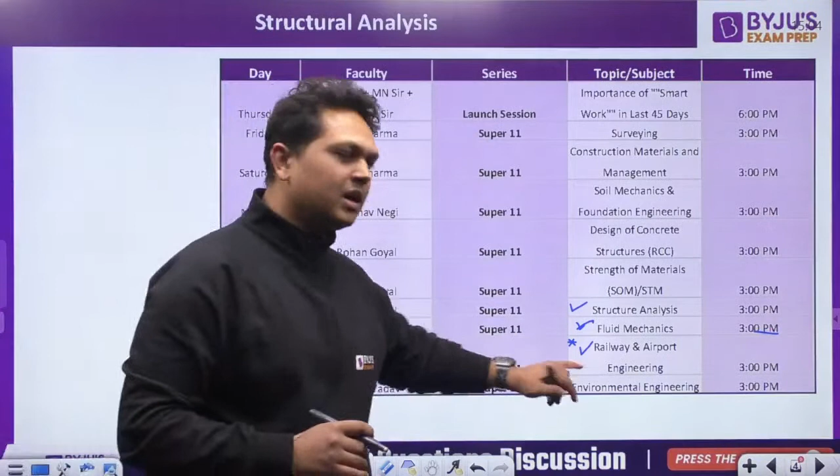So let us start. SOM weightage, yeah, it is around 4 to 6 marks on average, but you cannot say for sure that it will be this much only.

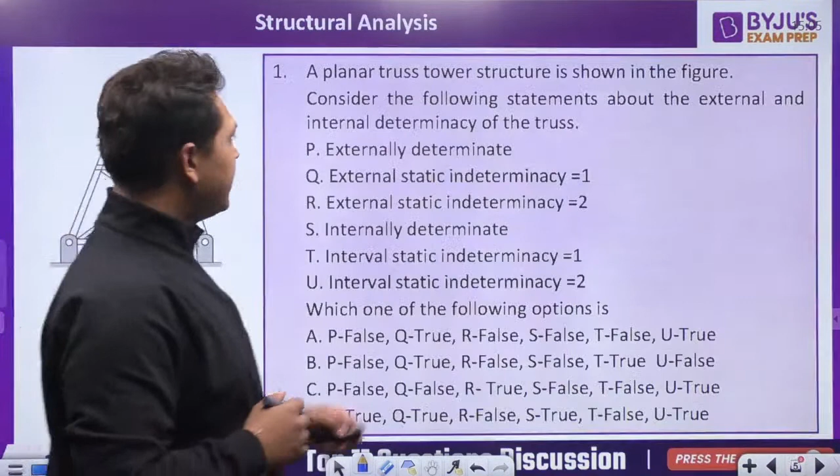Welcome, join fast, quick, we are about to start. So let us start with today's session. Here is the first question. Read the question carefully, very good question. A planar truss tower structure as shown in the figure - consider the following statement about the external and internal determinacy of the truss. You are given a truss over here, and you are asked to comment upon the external and internal determinacy of this given truss.

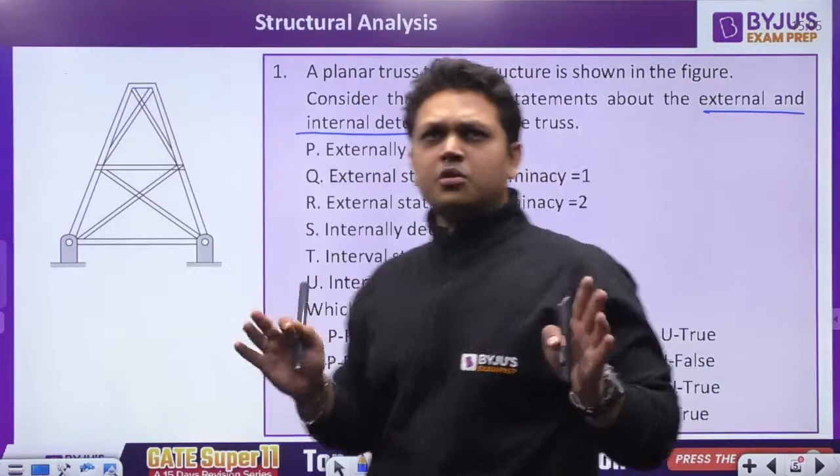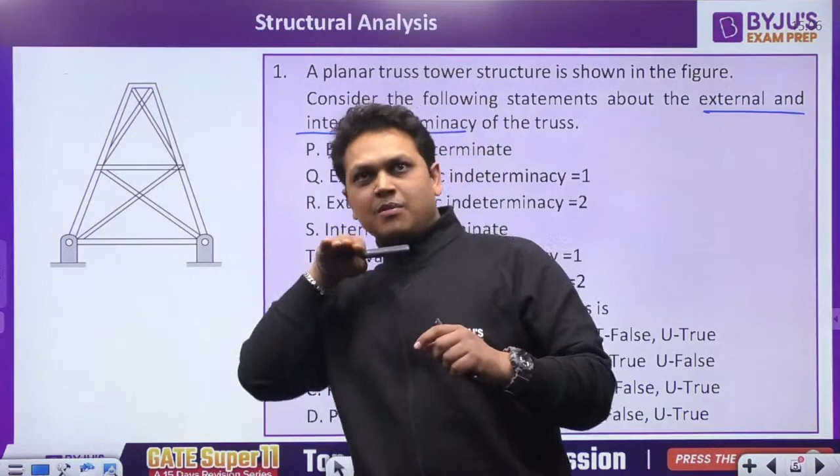Now, few students may get confused - sir, what is external determinacy and what is internal determinacy? Now, if you imagine your body, you are standing still right now. What are the external reactions you are getting on your body? If you are standing like this, the external reaction I am getting is from the ground below - there is a normal reaction from the ground below, over my foot, that is the external reaction. So if suppose I have skates on, if there is some horizontal reaction, what will happen? The skates will go ahead and I will fall down. So at a roller support, I have to balance as if there should be only a normal reaction upward, so if a horizontal force is there, I will fall - that means instability will occur.

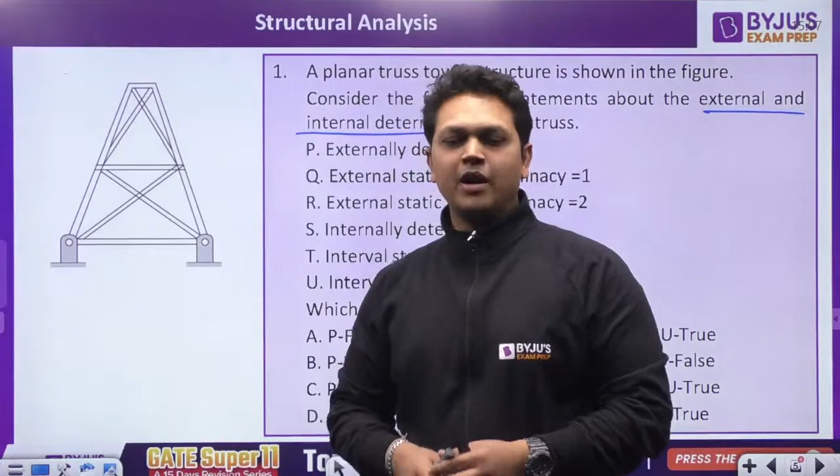So the number of external reactions are accounted by the external determinacy. And what do you mean by internal determinacy? Internal are the number of bones you are having in your body. If one of the bones is missing - I am lifting up this remote over here - if suppose this bone is missing over here, will I be able to lift this remote? No, it will behave like a rubber, my arm will behave like a rubber, it will be inefficient to lift any weight at all. So this is your internal determinacy.

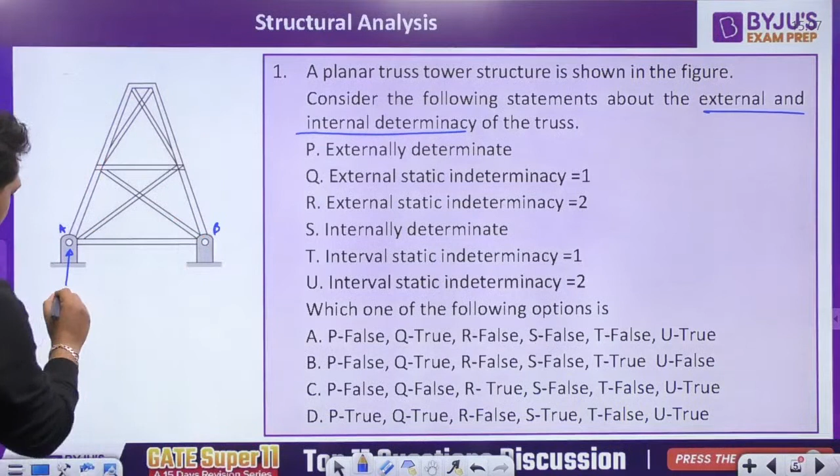Similarly, over here for this truss, the external determinacy will be the number of unknown reactions that are externally present. So we are having two pinned supports over here - let us call this as A, and let us call this as B. So there is a vertical reaction at A and a horizontal reaction at A, and similarly there is a vertical reaction at B and a horizontal reaction at B. So what are the number of unknown reactions? 4. So degree of external indeterminacy is given as...

Number of unknown reactions minus number of equilibrium equations. Number of unknown reactions: 1, 2, 3, 4 - 4 number of unknown reactions. Number of equilibrium equations - how many equilibrium equations do we have? We have 3 equilibrium equations: summation of forces in the horizontal direction, summation of forces in the vertical direction, and summation of moments at every point.

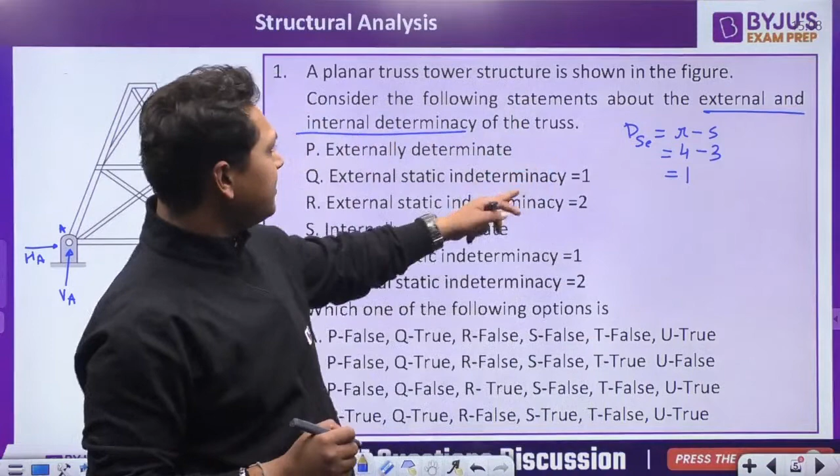So our external indeterminacy is 1 degree. That means the structure is externally indeterminate by 1 degree. Yes or no? Now internal indeterminacy is...

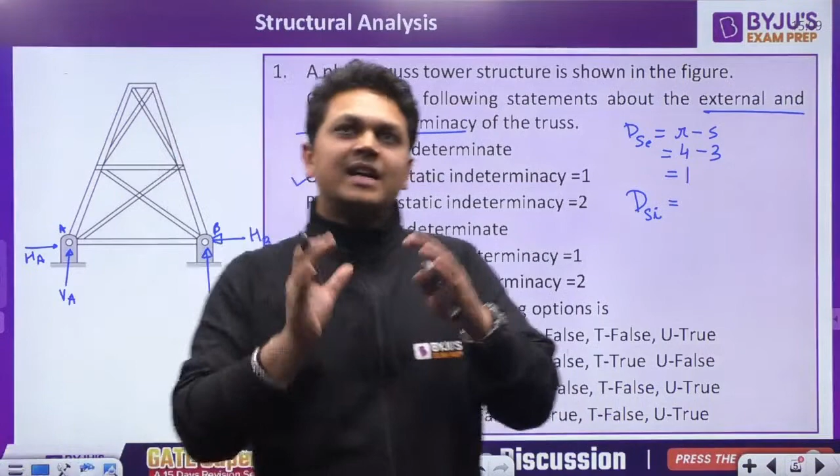How many extra members, redundant members is this truss having? This is given by the formula M minus 2J minus 3, where M is the number of members. Let us count: 1, 2, 3, 4, 5, 6, 7, 8, 9, 10 and 11. So we have 11 members.

11 minus 2 times number of joints. How many joints do we have? We have one joint over here. Let us write it as 1, 2, 3, 4, 5 and 6. So 6 joints we have. 2 into 6 minus 3, this comes out to be 11 minus 12 minus 3 is 9. 11 minus 9 is 2.

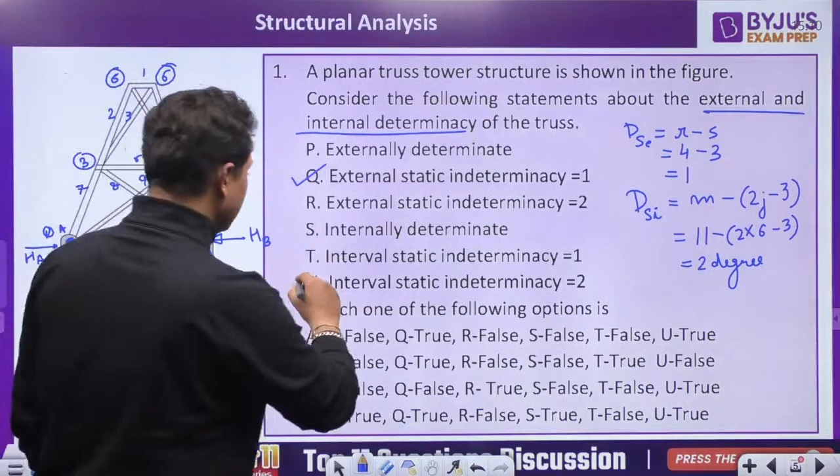So the degree of internal indeterminacy is 2 degree. So the answer is Q and U are correct, rest all are false.

So you are asked to tell which of the following options is the right answer. So P is false, so Q is true. So we are having Q true in these 3 statements, and then we are having U true, over here and over here. So we are having 3 options. No, we are having 2 options.

So this is not possible, and this is also not possible. So A and D. Now look over here, P is also true and S is also true, which is also false. So the answer is A. A is the right answer.

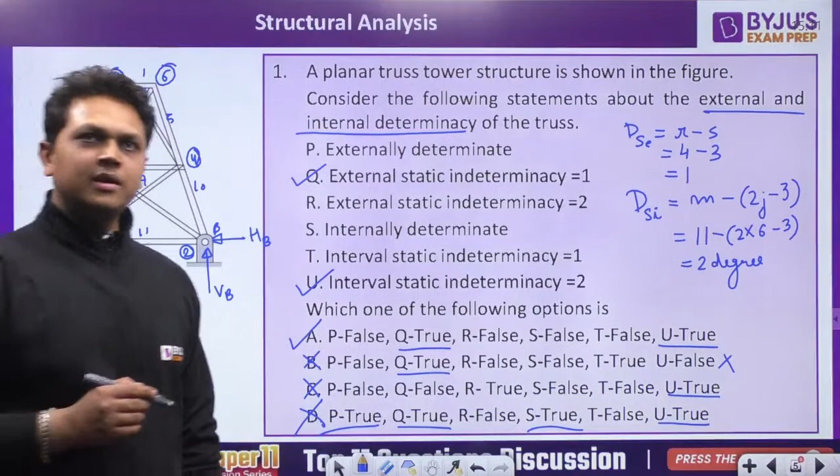Any doubt to anyone in this particular question? Very easy question and a very probable question also. Such type of questions are repeatedly asked based upon determinacy. Very easy questions. Just study the indeterminacy chapter once if you have not studied it yet, study the degree of static indeterminacy and kinematic indeterminacy, how to find those, for beams, trusses and frames.

Next, the degree of static indeterminacy of a rigid jointed frame PQR supported as shown in the figure. So you have to find out the degree of static indeterminacy for this particular frame. So over here it is given to you, this is a cable and this is your rigid frame. Let me make this a little thick over here.

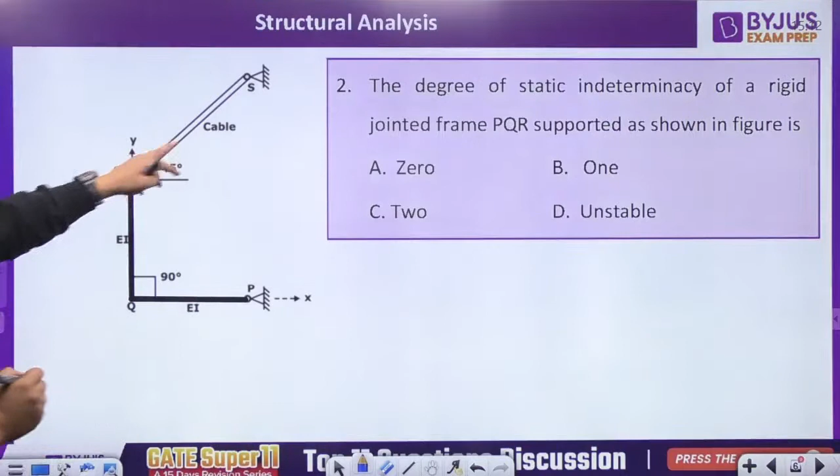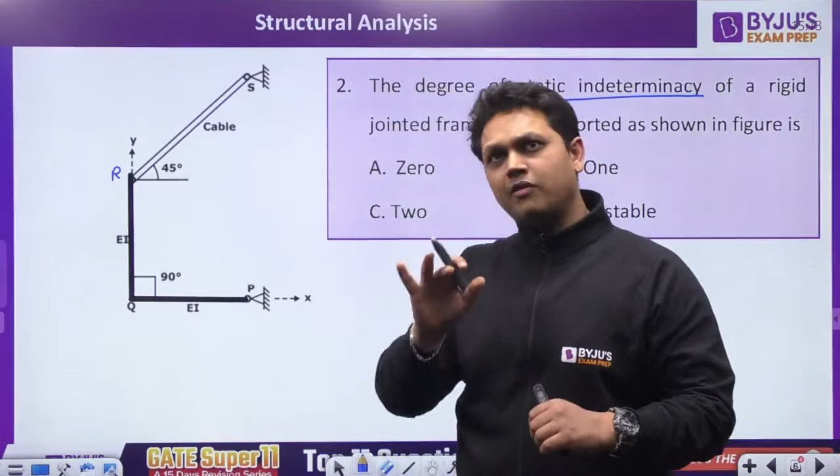So you are given a frame PQR, and this RS is given to you as a cable. RS is given to you as a cable. Now, what will be the degree of static indeterminacy asked to you? Beams are always internally determinate. The degree of internal static indeterminacy is always 0 for beams.

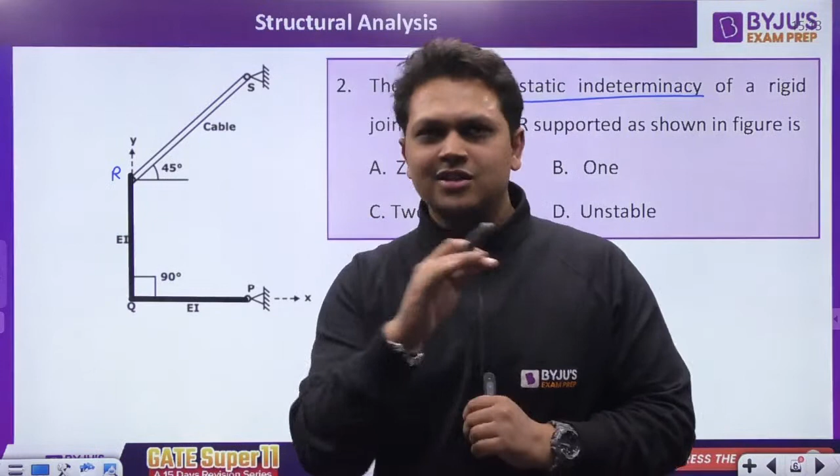So we are only going to have external indeterminacy. External means the number of external reactions applied by the external supports. What supports are we having? We are having a pin over here and a pin over here. At a pin support, you get two reactions: one horizontal and one vertical. So you draw a horizontal reaction at P and a vertical reaction at P, and similarly a horizontal reaction at S and a vertical reaction at S.

So when you do such a thing, this is where you make a mistake. Are these two unknowns? This is the question. When we write the equation, degree of static indeterminacy equals number of reactions minus number of equilibrium equations. R are your unknown reactions.

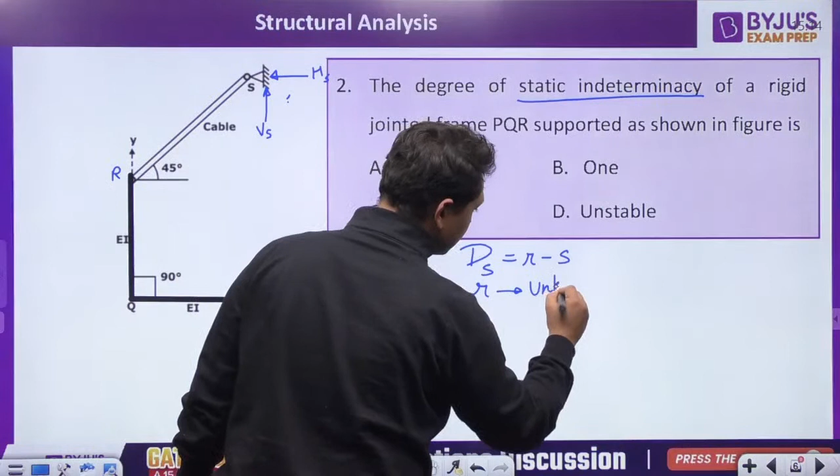These are your unknown reactions. So are these two unknown? The point over here is, there is a cable, and the cable is only able to take axial forces. So this cable can only be stressed axially, it may be tension, it may be compression, whatever it may be. I'm just taking an example. So the cable is only able to take axial forces.

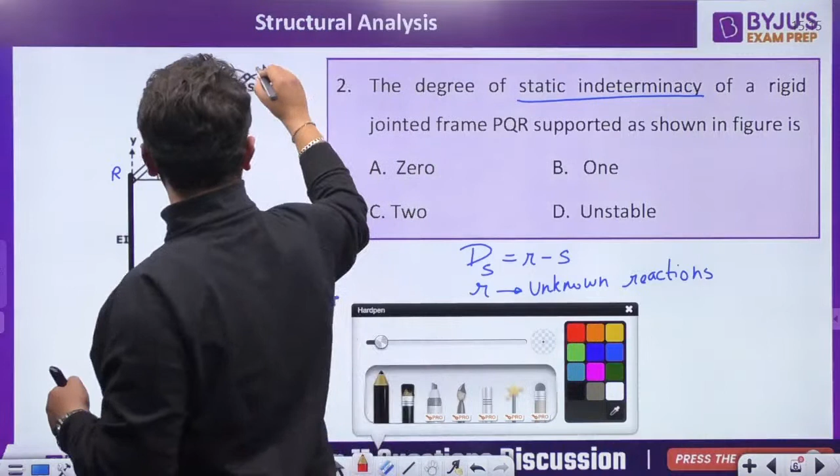So if it is only taking axial forces, the reaction offered over here will also be along the direction of the cable. Yes or no? The reaction that I'm going to get over here will also be along the direction of the cable, at an angle of 45 degrees. Yes or no, everyone? Do you understand this concept or not?

So if we know the direction of this reaction R at this pin support, don't we know what the horizontal and vertical components are going to be? R cos 45, R sin 45. Don't we know the horizontal and vertical components? And if we know them, are they unknown? No.

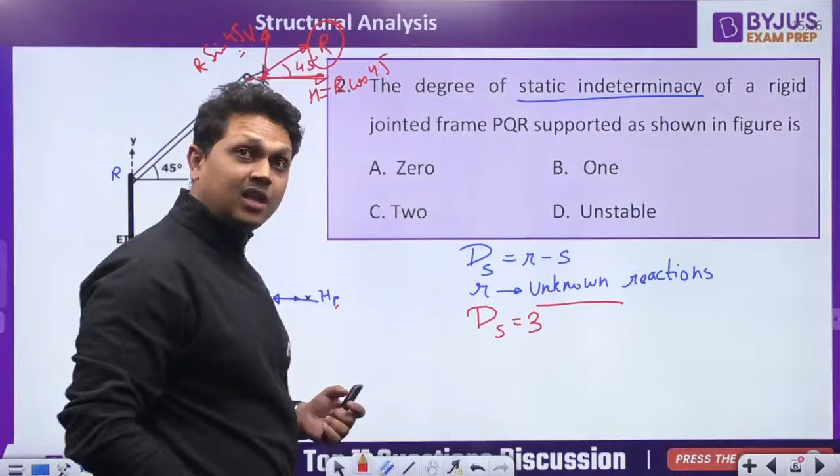So over here, the only unknown reaction is R. So what are the number of unknown reactions? 1, 2 and 3. So the degree of static indeterminacy is number of unknown reactions, 3, minus 3 equilibrium equations. So it comes out to be statically determinate, and the degree of static indeterminacy is 0. A is the right answer.

Very good question. You need to understand the property of a cable. That is all that is tested in this question.

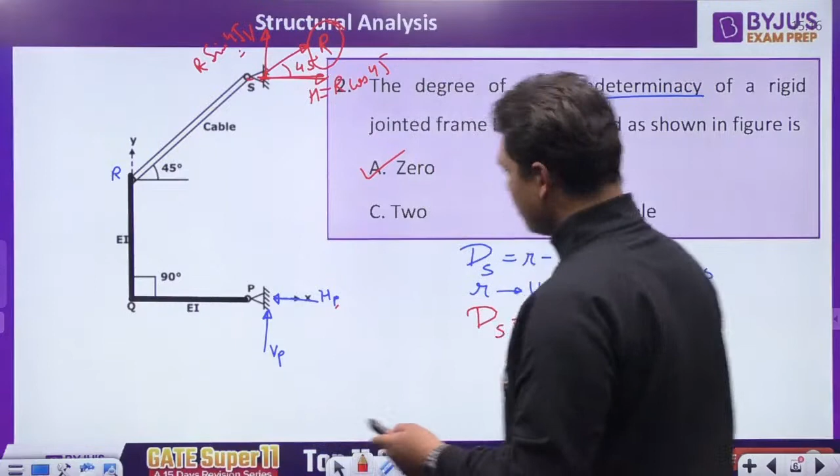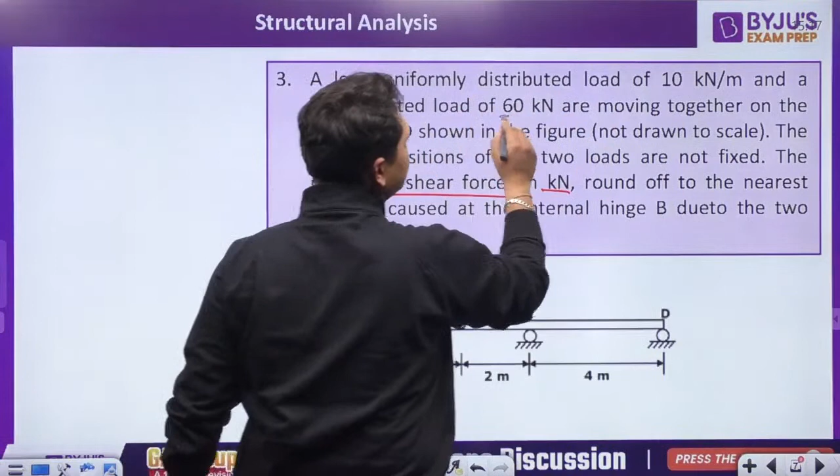Moving on. A long uniform distributed load of 10 kilonewton per meter and a concentrated load of 60 kilonewton are moving together on a beam ABCD shown in the figure, not drawn to scale. The relative positions of the two loads are not fixed. The maximum shear force in kilonewton, rounded off to the nearest integer, caused at the internal hinge B due to the two loads is asked. So basically it is asking us what is the maximum shear force possible at this hinge B due to these two loads, a point load of 60 kilonewton and a UDL of 10 kilonewton per meter.

So what do we need to do? We need to draw the ILD for shear force at B. In order to draw the ILD for shear force at B, we cut the section at B and lift the section by unit 1, by Mueller-Breslau's principle. So this is unit 1. You will get the ILD for shear force at B as this one. This is the ILD.

This can be positive or negative. Shear force can be either positive or negative. The sign is not mentioned as to what we have to take, but we will answer in positive only. We will not consider negative.

So now where should you place your UDL? Your UDL will come like this for the maximum shear force at B. And further, your point load will be at the maximum value over here. So the 60 kilonewton will be placed over here and the 10 kilonewton per meter will be placed over here.

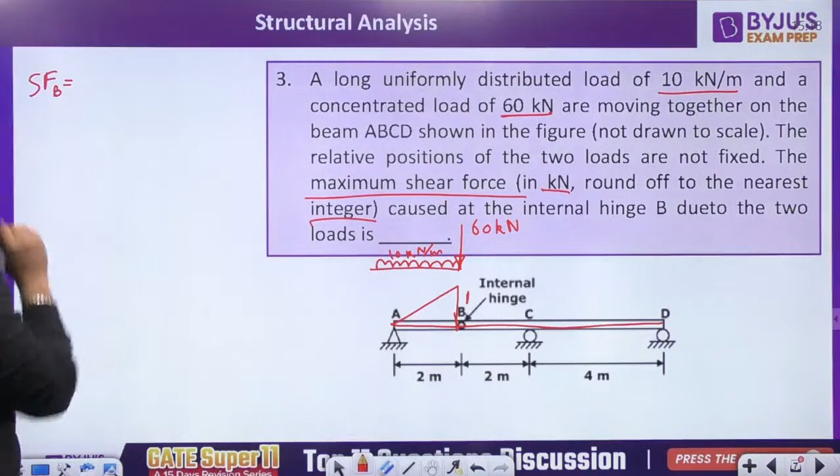Now what will be the shear force at B? It will be equal to the UDL into the area of this triangle, half into base, which is 2 meters, plus the point load into the distance below the point load on the ILD. So 60 into 1. This will cancel out, and this will become 10 plus 60, which is equal to 70 kilonewton.

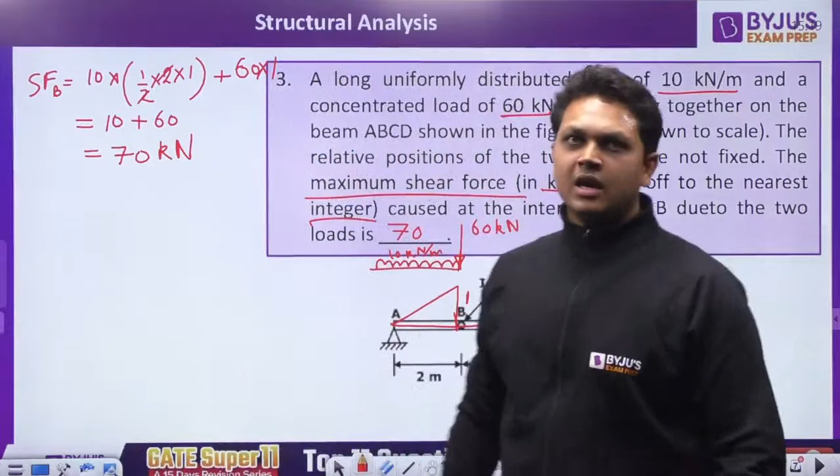So the answer is 70. Any doubt to anyone? Very easy question. All you need to know is how to draw the ILD. Rest all is very easy.

Next question. The influence line diagram shown is for the member. So you are given 4 members: PS, RS, PQ, QS. So which of the 4 members is the influence line diagram shown for?

Tell me. Very, very good question. Very good question. Tell me, guys. What is the answer?

So over here, the examiner is testing whether you know how a truss behaves. In order to find out the ILD, a student may think, sir, I have to check each and every member over here to tell which of the following is the ILD for this member, right? That is not possible, because testing for even a single member takes time. At least 5 minutes are required to draw the ILD for just one member.

And here I have to draw for 1, 2, 3, 4 members: PS, PQ, QS, and whichever is not there. PS is there, RS is there, QS is there, PQ is there. So this one, PR, is not there. So 4 members are there. So it is not possible to draw the ILD for each and every member and then tell which of the following member this ILD belongs to.

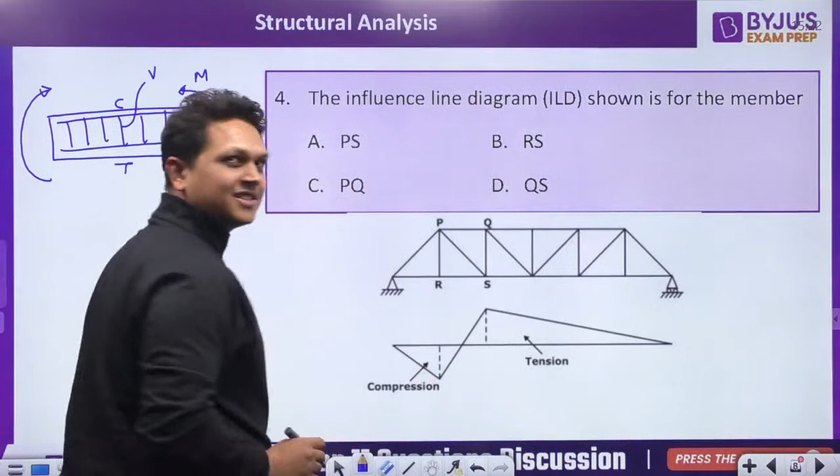Similarly, the top chord members of the truss respond to any load over the truss. See, the load is moving over the truss. Due to any load on the truss, the top chord members are under compression and the bottom chord members are under tension.

And these diagonal members are subjected to alternate compression and tension, depending upon the location of the load, whether it is over here or elsewhere. So depending on that, you can see there is compression as well as tension.

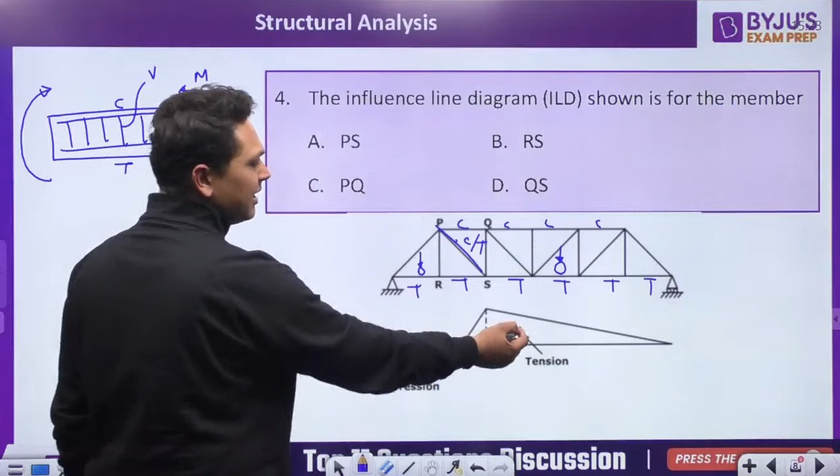So which of the four members does this ILD belong to? Obviously the diagonal member, that is PS. The answer is A. Isn't this an easy question? All you need to know is the behavior of a truss.

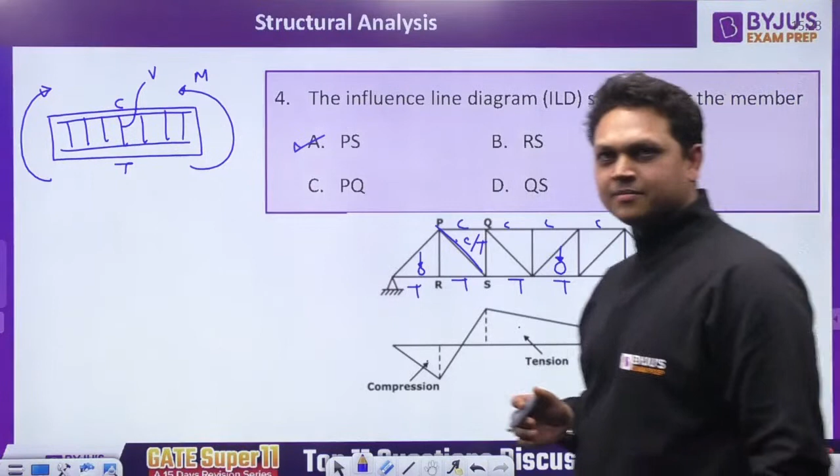Moving on to the next question. Another very good question, this concept has been asked in various questions. All members in the rigid jointed frame shown are prismatic and have the same flexural stiffness EI. Find the magnitude of... this question is incomplete.

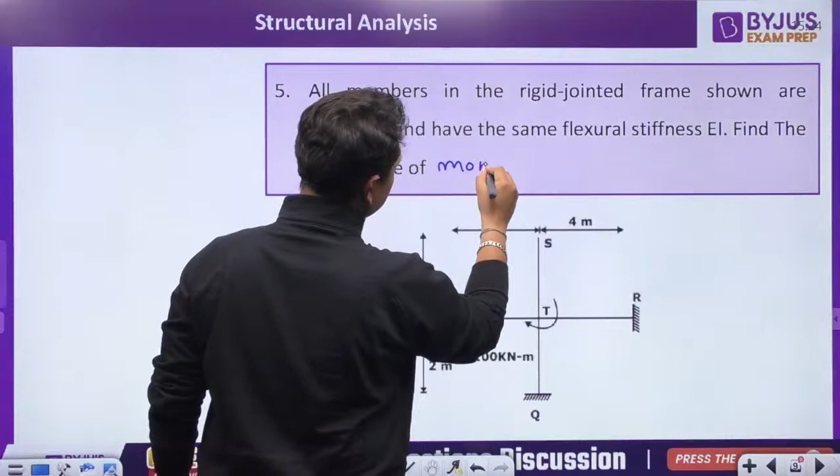Find the magnitude of moment at support Q. So what will be the moment reaction at Q, it is asked.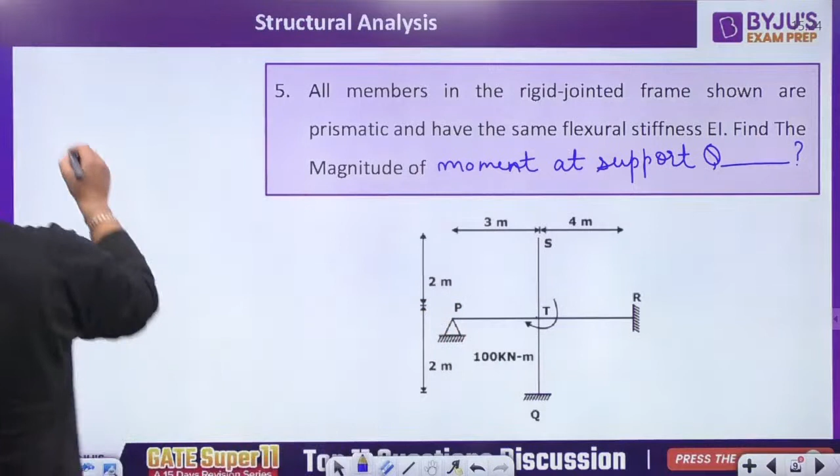The moment of 100 kilonewton meter is acting at rigid joint T. This 100 kilonewton will be distributed to all four members depending upon their distribution factors. You must have studied distribution factors, which is the stiffness of a particular member divided by the summation of the stiffness of all the members. So let us write down the stiffness factors for all the members.

We will have member, K, and distribution factor. The members we have are TP, TQ, TR and TS. For TP, the far end is hinged. For a far end hinged, the stiffness factor is 3/4 I by L. If you do not know these values, then you need to go through the basics again.

So 3/4 I by L. L is: this is 3 meters, this is 2 meter, this is 4 meter, and this is 2 meter. So L over here is 3 meters. I will substitute the value: 3/4 I by 3, this will cancel out, giving I by 4.

TQ's far end is fixed, so stiffness is I by L, which is I by 2. TR's far end is again fixed, giving I by 4. And TS, the far end is free.

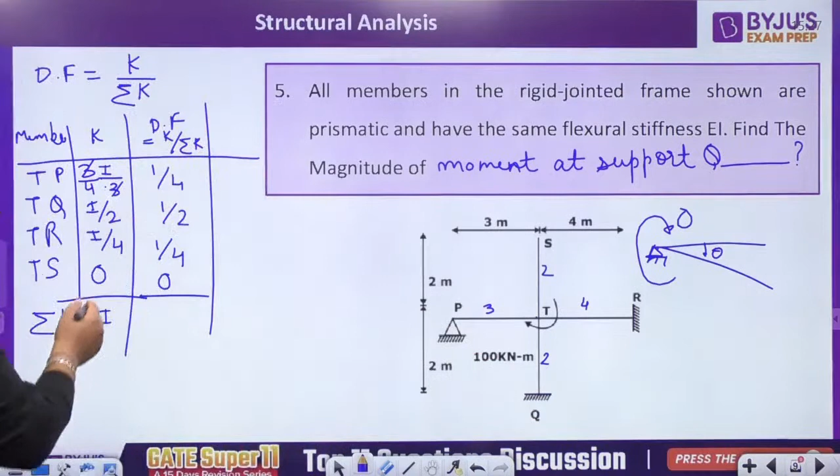One by 4, 1 by 2, 1 by 4 and 0. But we are only interested in TQ. So the distribution factor for TQ is 1 by 2.

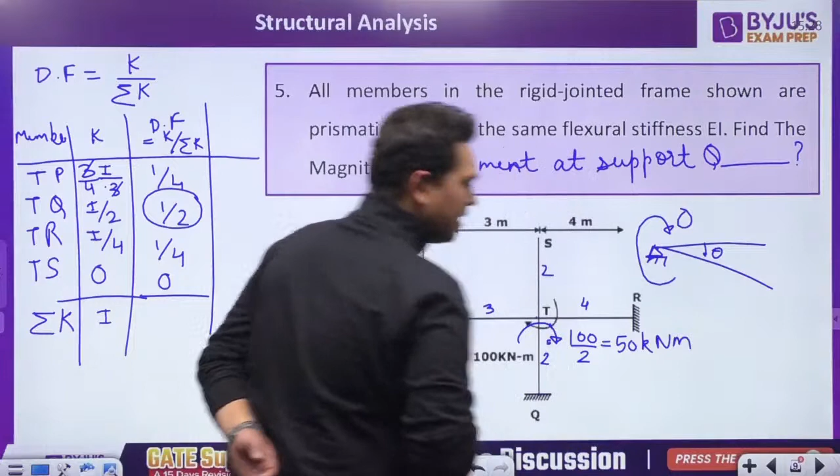If the distribution factor for TQ is 1 by 2, then this TQ member will be taking a moment equal to 100 by 2, which is equal to 50 kilonewton meter. But this is the moment which is going to be resisted by member TQ.

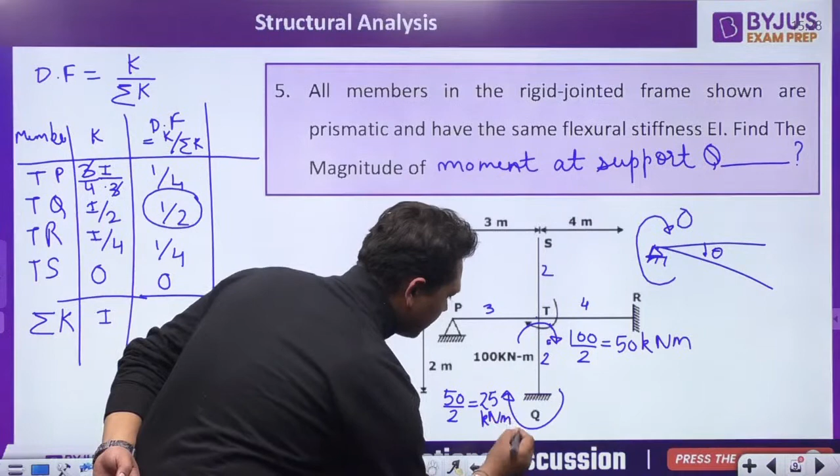But what will be the reaction at Q? Which is equal to the carryover moment. If there is 50 over there, the carryover moment will be 50 by 2, which is equal to 25 kilonewton meter. So the answer to this given question is 25.

What if S has a roller support? If S has a roller support, it still will not be able to resist any moment. It also depends upon the location of the moment, location of the roller. If the moment is applied like this, and the roller is provided like this, it will provide a reaction and behave like a pinned support. But if it is at some other location, it depends upon the reaction.

Moving on to the next question. Very good, everyone. This type of question has been asked at least 2 to 3 times in the GATE examination, so I am taking this question, and I also want to address one very good concept.

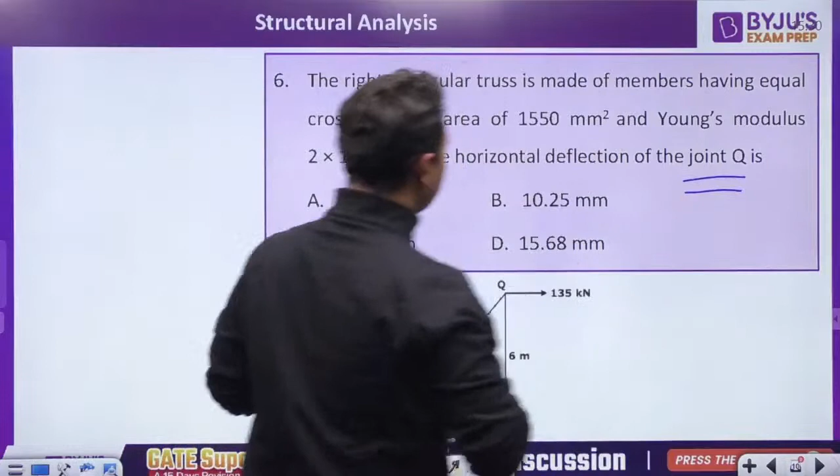A right triangle truss is made of members having equal cross-sectional area of 1550 mm square and a Young's modulus of 2 into 10 to the power 5 megapascal. What is the horizontal deflection of the joint Q?

So what are you going to do? You are going to use your formula. The horizontal deflection at Q is equal to summation of PkL upon AE. I will draw the table.

Let us take the member PQ and find out first the K value, then the P value, and the L value, and based upon that we will find out PkL upon AE.

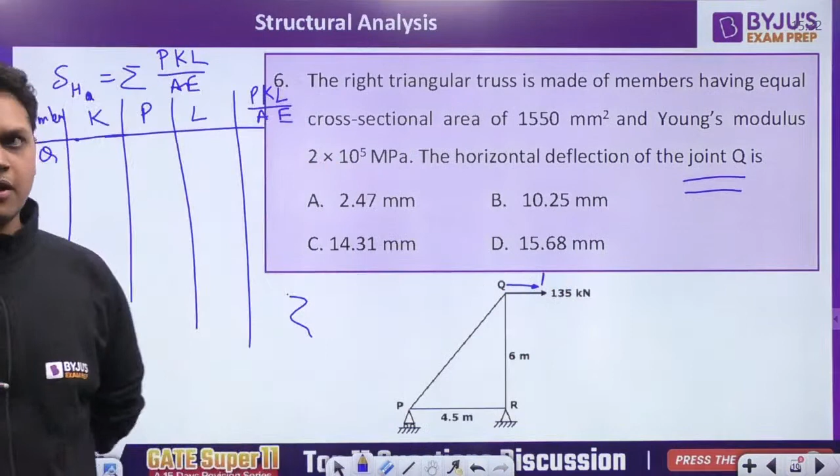For member PQ, K is the load which comes in this particular member due to a unit load applied in the direction in which you want to calculate the deflection. So you want to calculate the horizontal deflection at joint Q, so you apply a unit load in the horizontal direction at joint Q. Due to this horizontal load at joint Q, the reactions in the other members need to be calculated.

This is 4.5 and this is 6, and this is a right angle triangle. What is 4.5? 3 times 1.5. What is 6? 4 times 1.5. Don't you see something similar here? 3, 4 - it is a magic triangle. So this is 3, 4, and this will be 5 times 1.5, which is equal to 7.5.

If this is 1, there will be a reaction. Since 1 is acting in this direction, you require a resistance in the opposite direction, so this will act in the opposite direction like this. This creates a component of the reaction in the downward direction, so the reaction here will be like this. Similarly, this reaction is in the upward direction, so the component will be in this direction, and we require a resistance in this particular direction, so it will be like this.

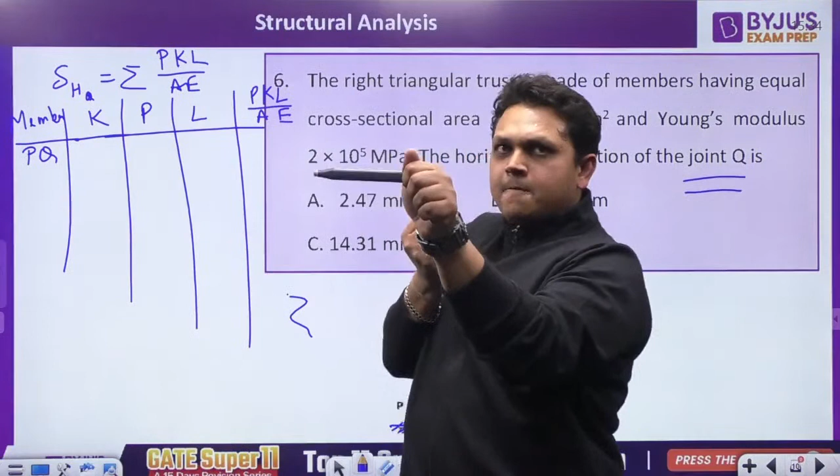Why? If this is pinned, if these two supports are pinned, that means they are fixed at the location. If I have a member in between two supports that are fixed, will this member ever be stressed? Never. This will get stressed only when there is some deformation. If this is a roller, and it wants to move in this direction but the member pulls it back, then it will be under stress because it is providing resistance - only because there is a roller here. But if it is pinned, it will not be stressed; it will have zero force.

So once GATE has also asked a question giving pinned supports at both ends, you just need to pay attention to the supports. Over here, since a roller is there, you will get a reaction here.

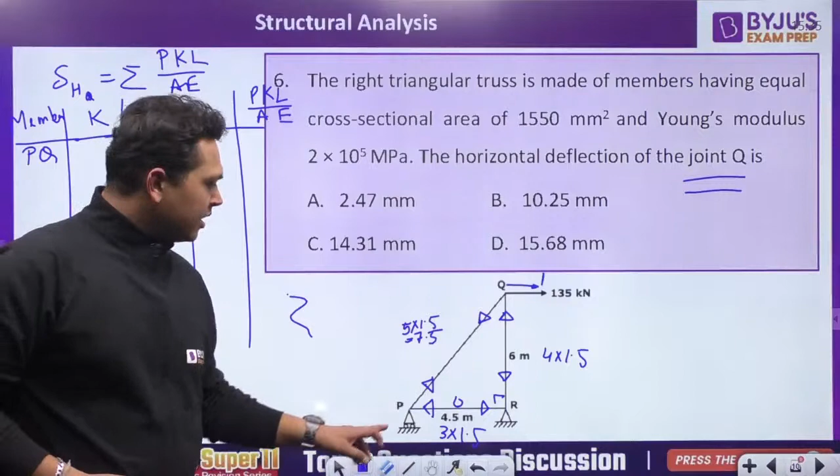I have done my calculations, and I will give you straight away the reactions to save some time. So if this is 1, then this will be 5 by 3, and this will be 4 by 3, and this will be 1.

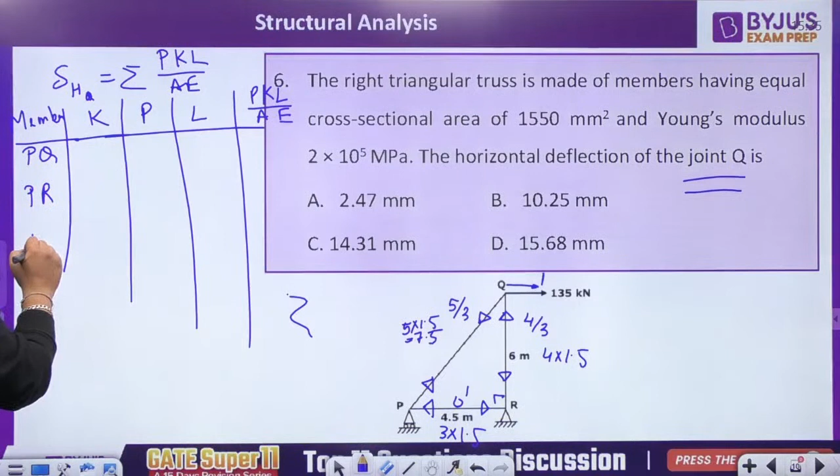So I will write down for PQ, PR, and QR or RQ. The K value for PQ - we will take tension as positive and compression as negative - so this is in tension, 5 by 3.

PR is in compression, minus 1, and QR is also in compression, minus 4 by 3. If for 1 unit load I am getting 5 by 3 unit load in this member, then how much will I get for 135? It will be 135 multiplied by 5 by 3, and similarly minus 135 will be minus 4 by 3 multiplied by 135.

Try to save your time. Understand this unitary concept, how the units are working. Length is for PQ 7.5, for PR 4.5, and for RQ 6.

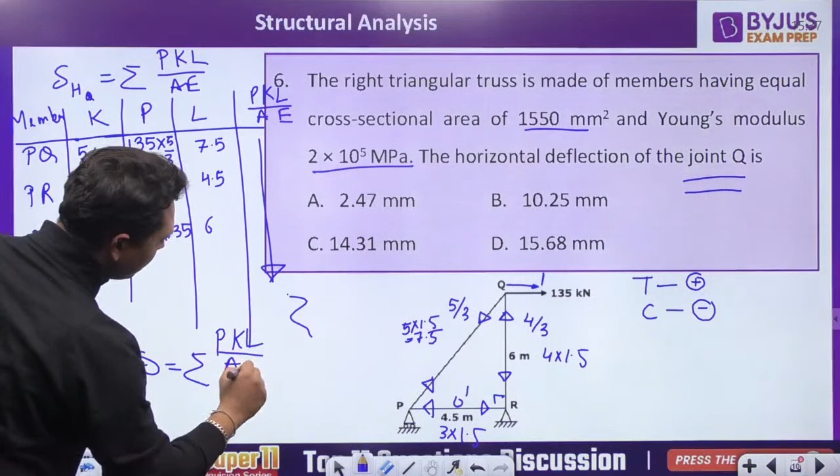Now multiplying PKL, AE is given over here. Substitute all the values and find your summation. Your delta is equal to summation of all these three, PKL upon AE. If you calculate this, the answer that is going to come is 15.68 mm.

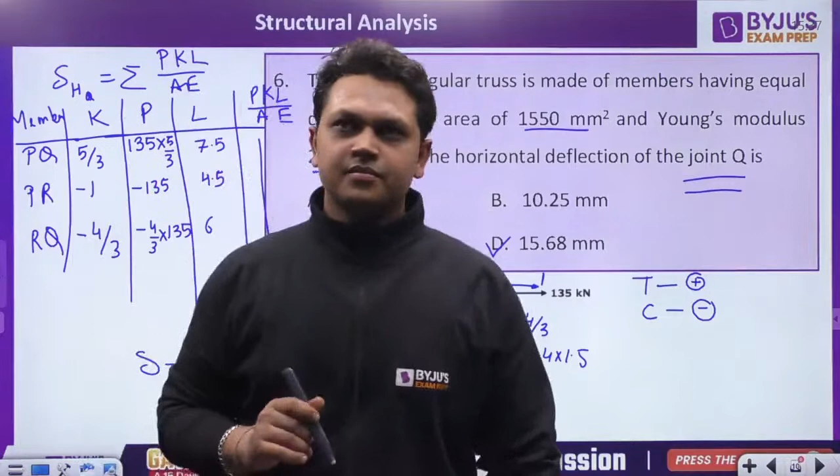Understand the concept. Very good, Raja. You will get 15.68 as the answer. Do you understand? Any doubt to anyone? Is it clear to all? Let us proceed.

Carryover factor CAB for a beam shown in the figure below. I am expecting this kind of question again, because it has been asked only once, and students are going to get confused over here. So what is CAB?

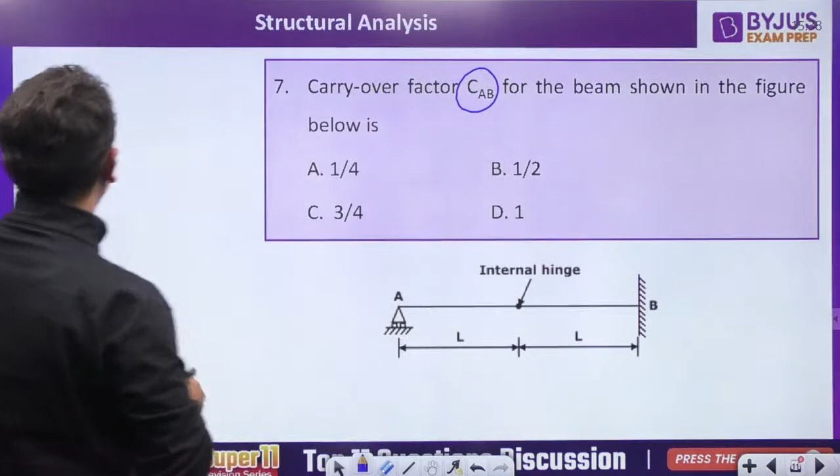So this is carryover factor, you can write down, is equal to carryover moment at B divided by applied moment at A. Is it clear to all? Carryover moment at B due to applied moment at A.

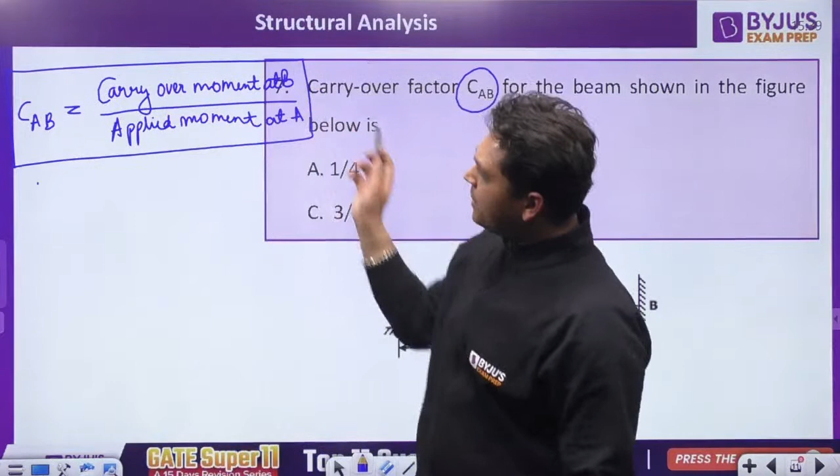Let us say you apply a moment M over here. So what will be the carryover moment at B? It is asked to you. What is the carryover factor at B? So let us divide the particular beam at the hinge.

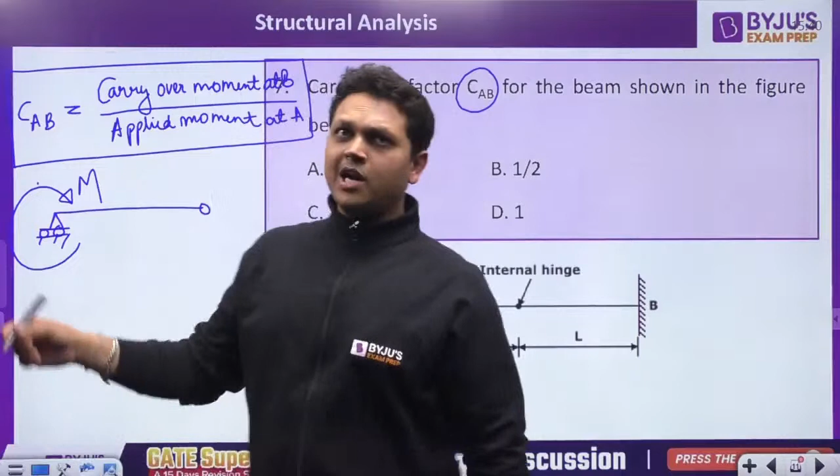Let us draw the free body diagram. And this is your hinge. Now moment is applied over here. What is the bending moment at the hinge? It is 0. The bending moment at the hinge is 0.

So it will only take your reaction. Due to this, the moment is acting in the clockwise direction. In order to resist this, a couple will be generated in the anti-clockwise direction. The length of the member is L, so a couple is going to generate in the anti-clockwise direction.

Moment is M in the clockwise direction. There is a couple in the anti-clockwise direction, whose magnitude is... any doubt? Check whether the moment at this hinge is 0 or not. It is going to be 0.

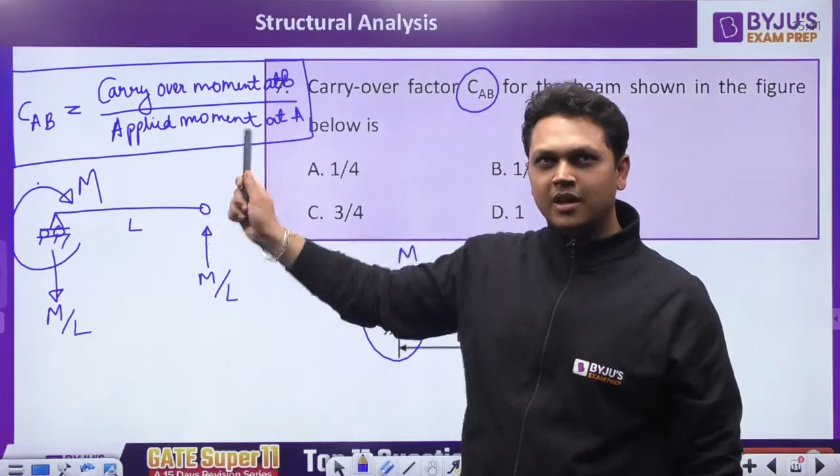Now, if a reaction is acting in the upward direction at this hinge in this free body diagram, then on this particular end, if it is acting in the upward direction, over here it will be in the downward direction.

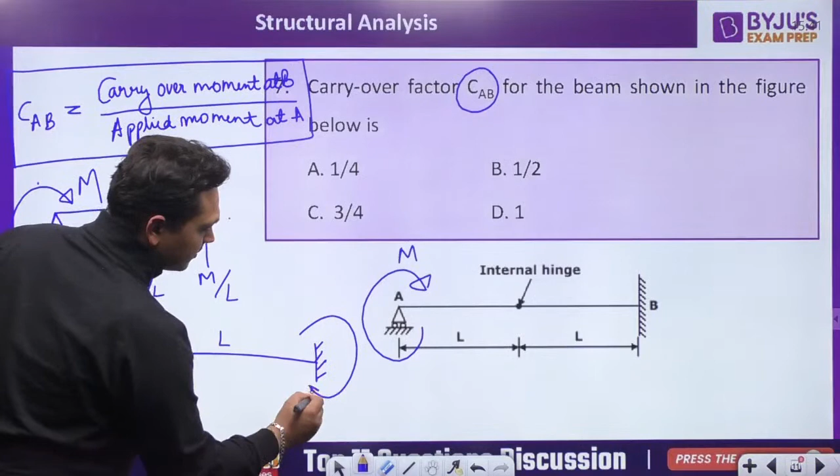For equilibrium, equal and opposite. Now if there is a downward M by L acting, the moment over here is in the anti-clockwise direction. This M by L is providing a moment in the anti-clockwise direction, so the resistance will be in the clockwise direction, whose magnitude is M. Yes or no? Is it clear or not?

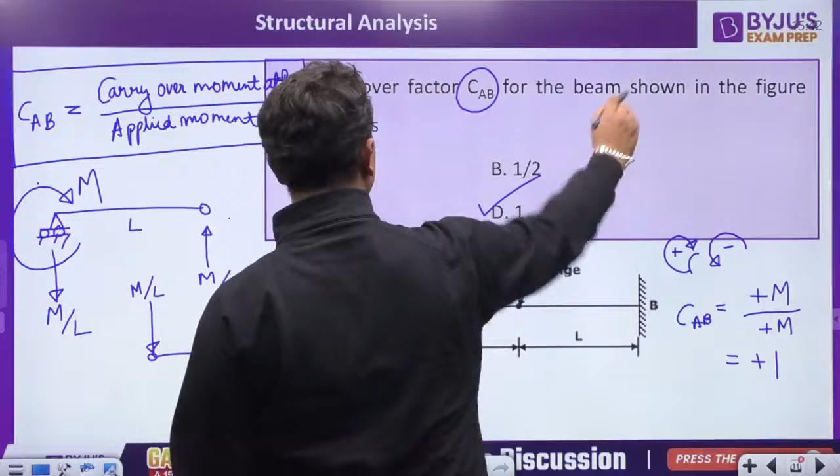So what is the carryover moment at B due to applied moment at A? The applied moment at A is clockwise, so let us write clockwise as positive and anti-clockwise as negative. The carryover factor CAB will be equal to applied moment at A plus M, clockwise plus M, it will be equal to plus 1. So the answer is D.

Is it clear to all? Any doubt to anyone? Is it clear to all? Yes, everyone.

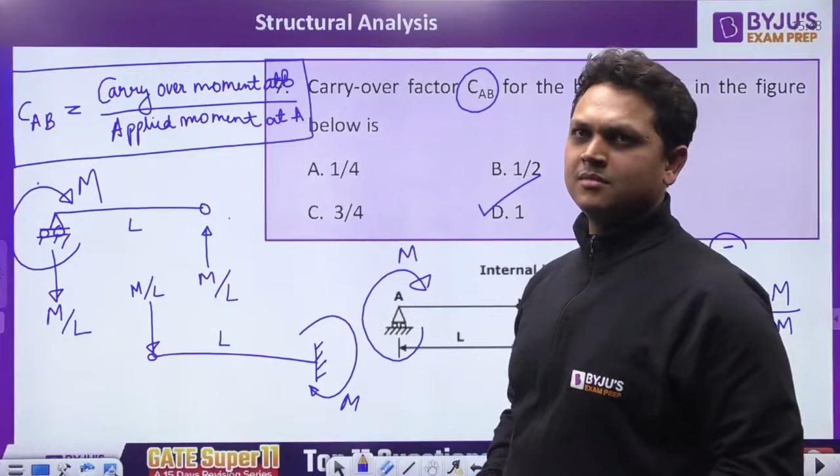If lengths are different, then the calculation will go accordingly. What I have done over here is I have used the equilibrium equations in a short manner. If the lengths are different, you can use the equilibrium equations and solve accordingly.

Very easy. Next question. Consider the portal frame shown in the figure. Assume the modulus of elasticity as 2.5 into 10 to the power 4 megapascal. The moment of inertia is this, for all the members of the frame. Find the rotation in degrees.

See, degrees. The student will give the answer without considering this fact. Up to 1 decimal place. At the rigid joint Q would be.

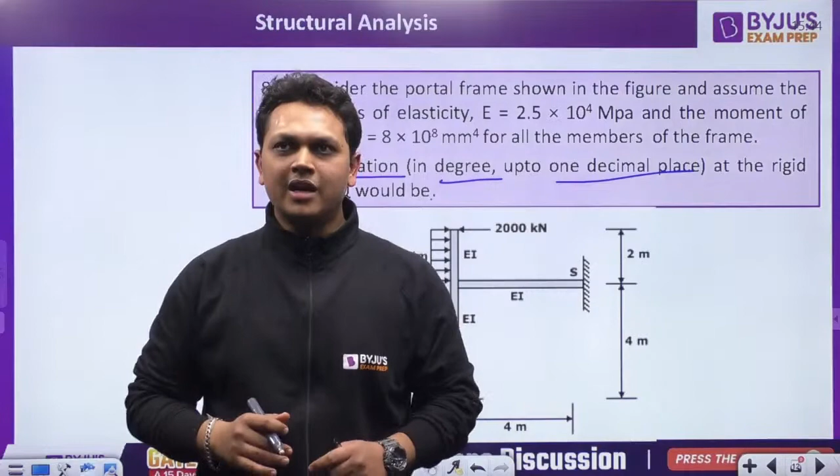Read the question twice in your examination. While attempting the examination, do not be in a hurry. Write this on a sheet of paper and paste it in front of your study table. Read the question twice, every time you study a question.

Now, you are given a frame and the loading is only given on this particular part, this freestanding wall over here. We are asked to find out what is the rotation of this joint Q. So in order to find out the rotation at this joint Q, I am going to first see what will be the equivalent moment due to this. So what is the moment at Q?

Let us take clockwise positive, anti-clockwise negative. Clockwise, 1650 into 2 square by 2, minus 2000 multiplied by 2. Solve and tell me what is the value you are getting for the moment over here.

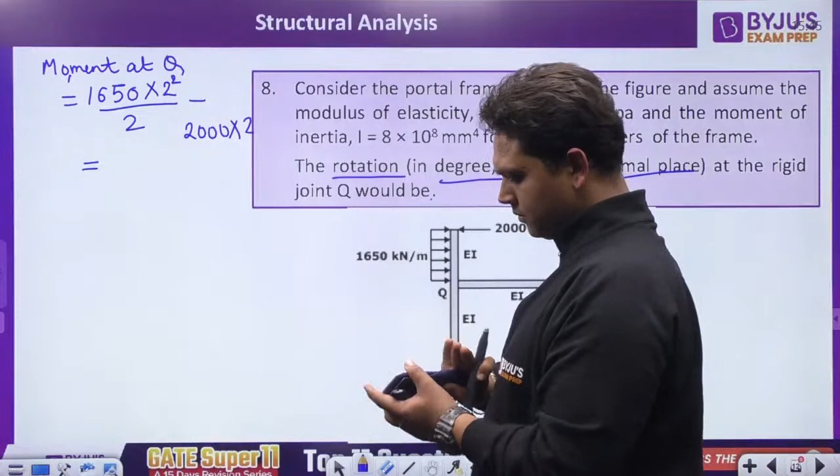Minus 700 minus. So what I am going to do, I am going to apply an anti-clockwise 700.

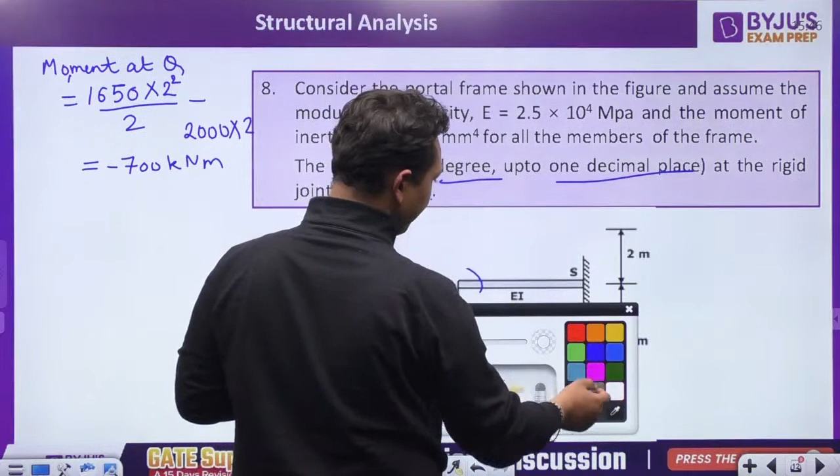Now all I need to do is analyze this particular problem over here. Let me show, I am going to erase this particular part. And now I am only interested in this particular portion, 700.

Check these two members, QS and QR. Both of the members are having same stiffness EI, both are having the same length, 4 meters. Don't you think that both of the members are having the same stiffness EI by L? If both of the members are having the same stiffness, this 700 is going to be distributed equally in both the members.

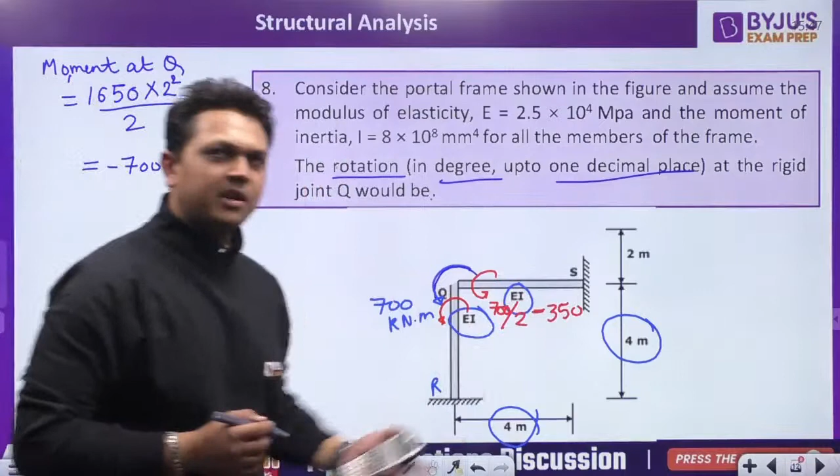So the rotation in any particular member at this joint Q will be due to this 350. So all I need to analyze is this one. So this is Q and this is S. So what is the rotation, theta, at this joint Q due to this 350 kilonewton meter? So theta at Q is equal to

ML upon 4 EI. These are your basic formulas. M is 350 kilonewton meter converted into Newton mm, multiplied by L. L is 4 meter, 4000 mm, divided by E, 2.5 into 10 to the power of, this should be, I guess, 5. I'm not sure, let us take this 4, 10 to the power of 4.

Not plus, sorry, multiplied by I, 8 into 10 to the power of 8. And this 4 is also there, right? 4 multiplied by. Now this is in degrees or radian? This is in radian.

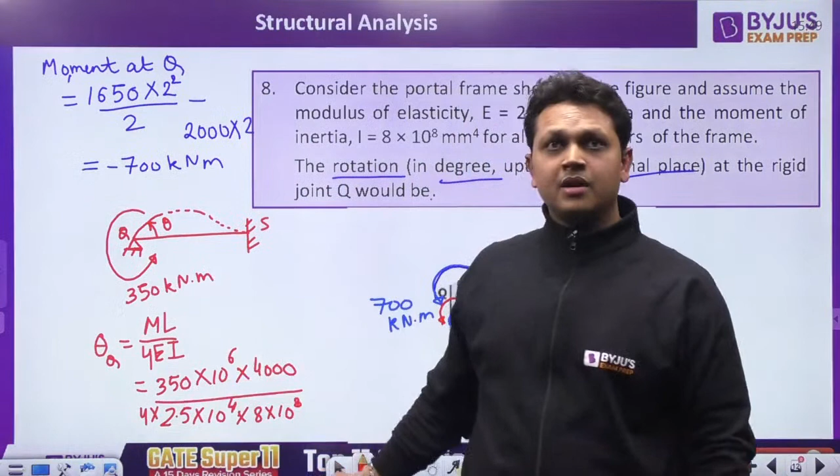So you have to convert it into degrees also, multiplied by 180 by pi. Now this you are going to get in degrees. Tell me what is the answer you are getting over here. Calculate and tell me the answer, everyone.

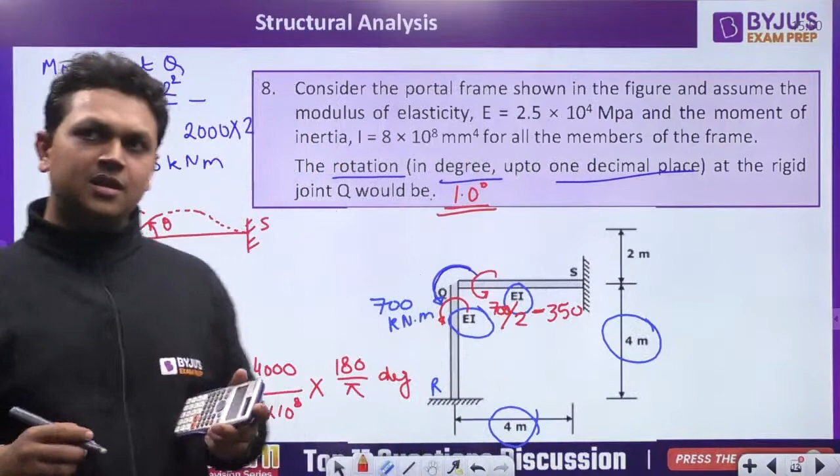You're going to get as 1.002 something, 1.002 degrees. So round it off to the first decimal place, so it will be 1.0 degrees. The answer is 1 degree itself. Check your calculations, Harita. PM, yes, your answer is right. Mayank, you also need to check your calculation.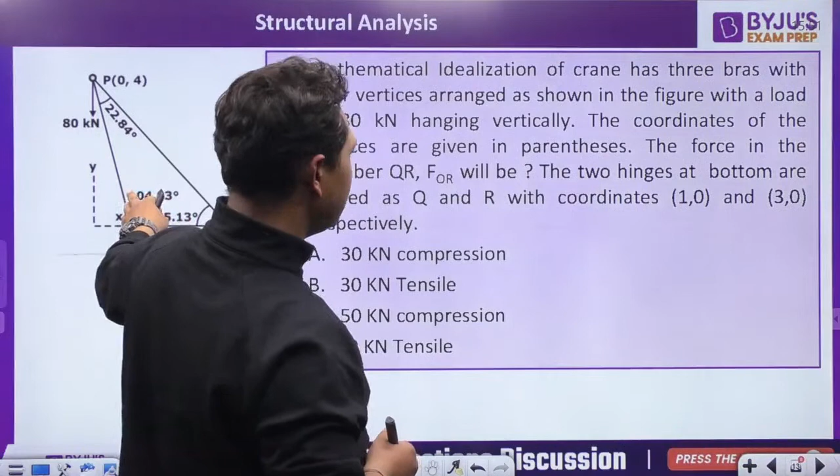Mathematical idealization of a crane has 3 bars with their vertices arranged as shown in the figure, with the load of 80 kilonewton hanging vertically. The coordinates of the vertices are given in the parentheses. Find the force in the member QR. So this is Q, this is R. There is one roller support over here, guys. This is a roller support.

This is a roller support. The forces in the member QR will be F force in QR. The two hinges at the bottom are named Q and R, with coordinates 1,0 and 3,0 respectively. So guys, you are given the coordinates of these two points.

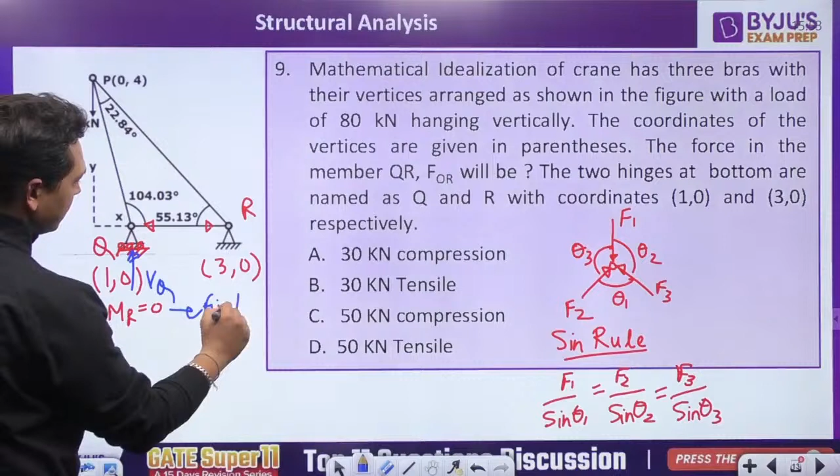Using sine rule, you can easily calculate. So first of all, you can do summation of moments at R equal to 0. You have a reaction at Q, a vertical reaction at Q. Using this, you will find VQ, the vertical reaction at Q.

After finding the vertical reaction at Q, you can use the sine rule and easily find out the reaction in QR. This is your homework problem. You will get the answer as 30 kilonewton in compression.

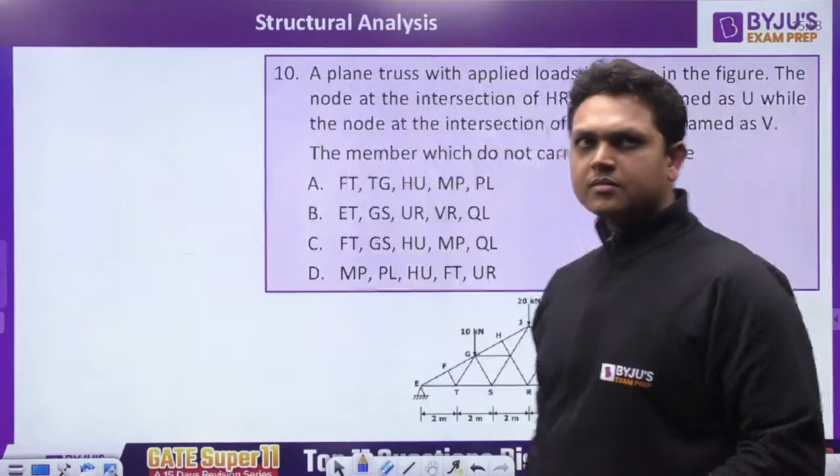Next question. A plane truss with the applied loads is shown in the figure. The nodes are intersecting at HR. The node at the intersection of HR and JS is named U. The node at the intersection of KR and JQ is named V. You are asked to find the members which do not carry any force, that is, zero force members.

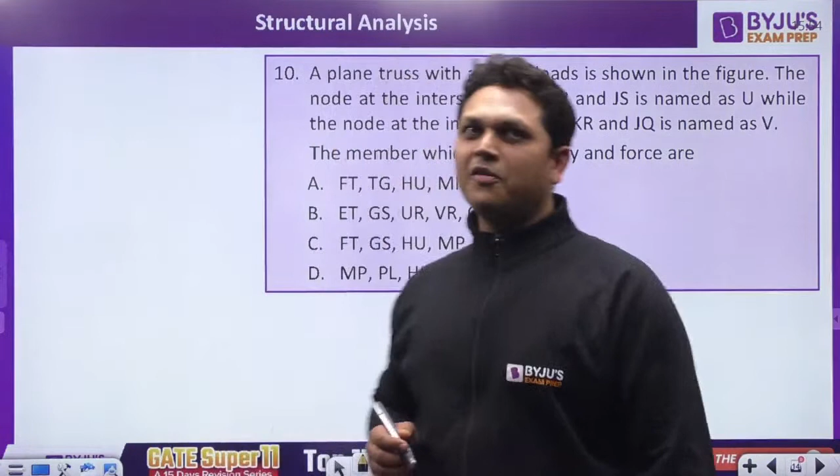Zero force members are asked of you. Very, very popular question for GATE. Zero force members.

So you need to know two principles. There are two cases. Case 1: when do we have zero force members? When there are two members joining at a joint at some angle theta, and there is no force upon this joint, then both the members are zero force members.

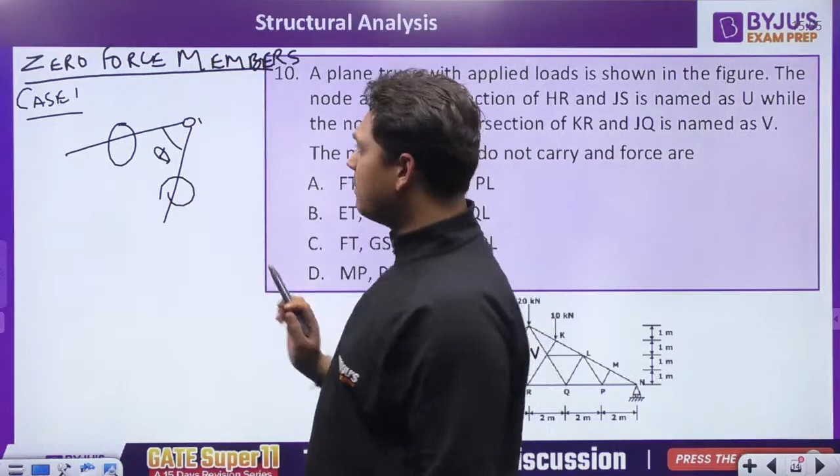Case number 2: when there are two members which are in a single line, and there is another member which is perpendicular out of this line, then this third member will always be a zero force member.

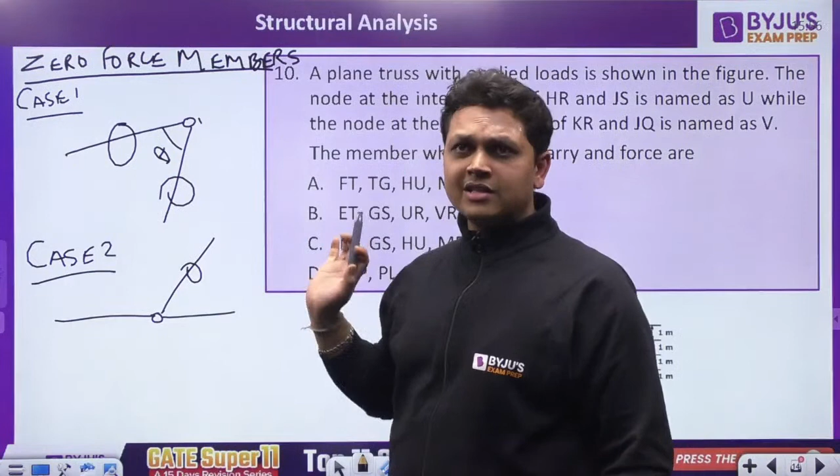Why? You need to draw the free body diagram. Very easy reasoning to this one. All you need to do is the free body diagram. I have just given you the gist of it. Let us use this principle over here.

Now if you look at this member FT, EF and FG are linear and this FT is out of the plane. So this will be a zero force member. Are you guys able to see the diagram?

So this is going to be a zero force member. Now if this is a zero force member, then ET and TS are linear and TG is out of the linearity, so this will also be a zero force member. Similarly over here, this is a zero force member and this is a zero force member.

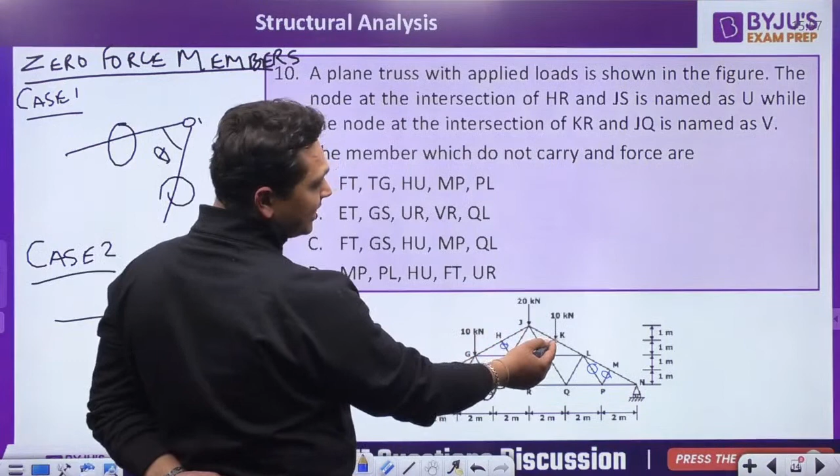Further, if you look at joint H, GH and HJ are linear and HU is out of the line, so this is a zero force member. But this is not the case over here, since at K we have a 10 kilonewton load. So this KV is not a zero force member.

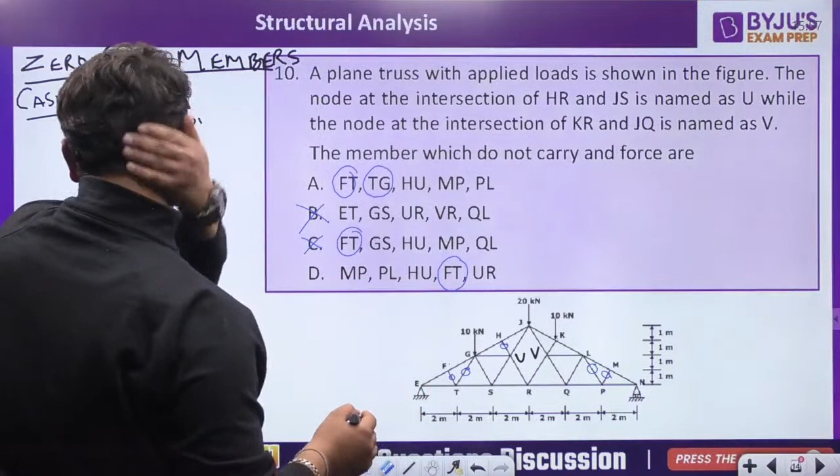So what are all the zero force members? FT, TG, HU, MP and PL. So A is your right answer, guys.